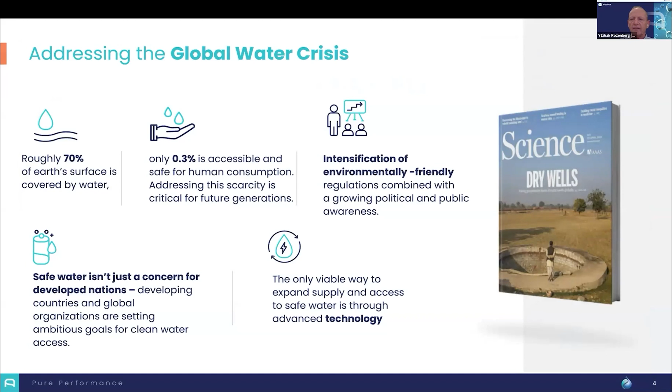As many of you know, only a small portion of Earth's water is safe for consumption. Technology is the only way for ensuring global access to safe water. Our solutions focus on eliminating pollutants rather than capturing or sorbing them, which only transfers the problem from one place to the other. We put all our efforts in finding ways to solve the problem by using HOD UV light.

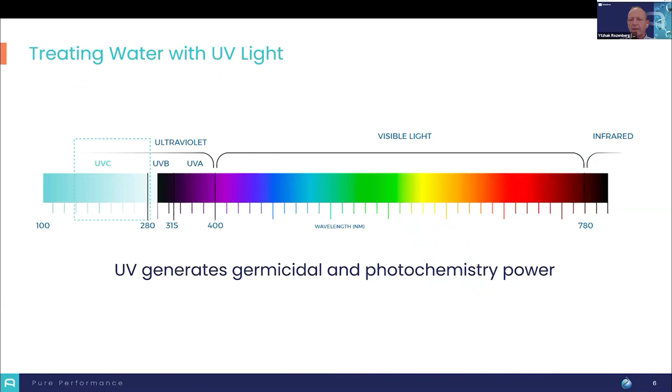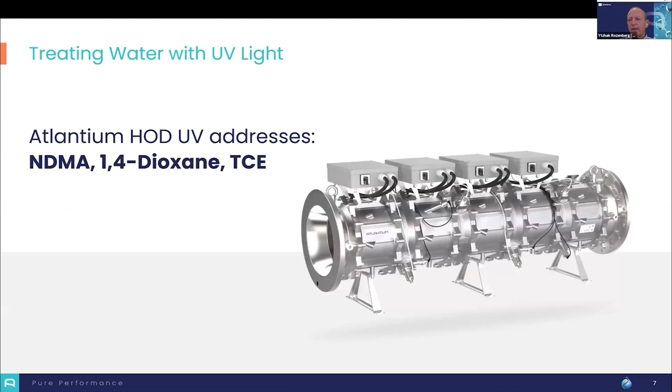UV light is a viable tool for photodecomposition of pollutants while generating germicidal and photochemistry power by direct photolysis or in combination with dedicated additives. Atlantium is currently active in providing solutions for such needs, such as NDMA, 1,4-dioxane, TCE, and others.

Now let's talk about PFAS, also known as forever chemicals. These chemicals are resistant to breakdown and persist in the environment. Atlantium has teamed up with Enspired Solutions to provide a highly sophisticated solution to eliminate PFAS. Effective PFAS destruction with UV requires consideration of the specific water characteristics, the target power, and the light spectrum. Optimizing for these aspects ensures the system delivers maximum effectiveness in addressing PFAS contamination.

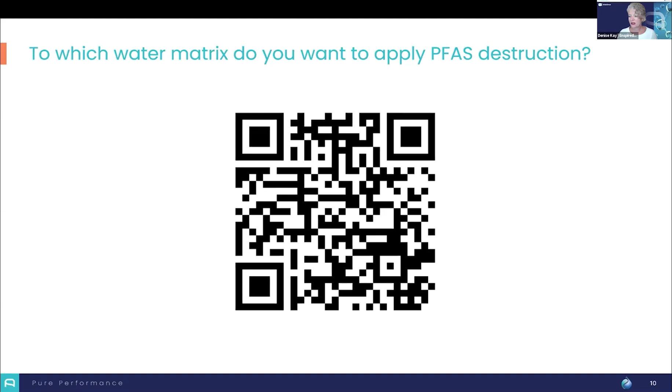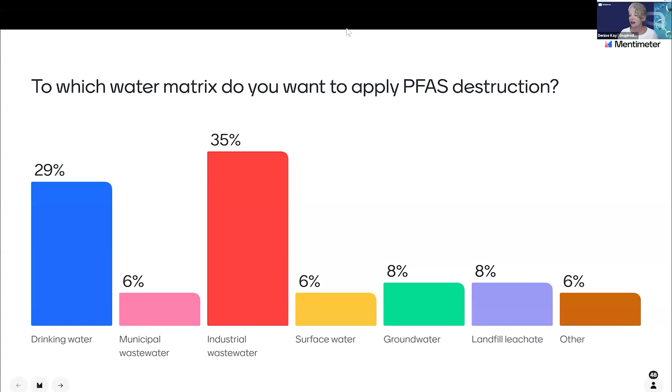It looks like industrial wastewater is leading, with drinking water not far behind. Groundwater contamination is pretty significant too. Thank you. That's a great indication and very helpful to us.

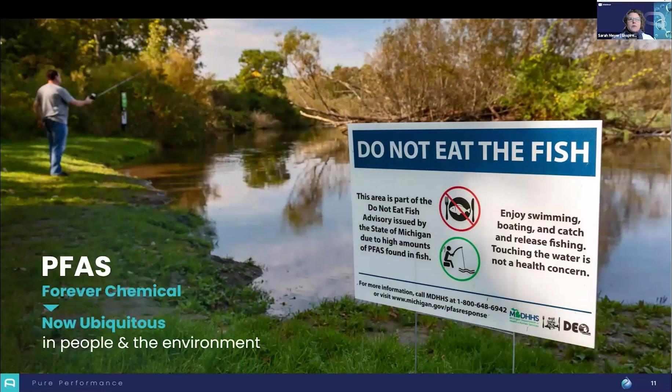I'm going to start by building on what Itzhak started with today. PFAS, they're referred to as forever chemicals because they don't naturally break down in the environment. And the rising amount in our global water resources has resulted in 95% of us having detectable levels of PFAS in our blood. There are many routes for PFAS to get into the environment, and human exposure comes through water, food, and convenient household products. Unfortunately, PFAS exposure is now linked to negative reproductive outcomes and multiple types of cancer.

With the increasing regulation and growing awareness of risks posed by PFAS, companies contributing to environmental releases are facing substantial costs. Fines and litigation settlements related to PFAS pollution are frequently in the news these days, with costs ranging from millions to actually billions of dollars. Current methods to manage PFAS in water effectively really just push it around, capturing it on filter media and disposing of it in ways that can risk re-releasing a portion back into the environment.

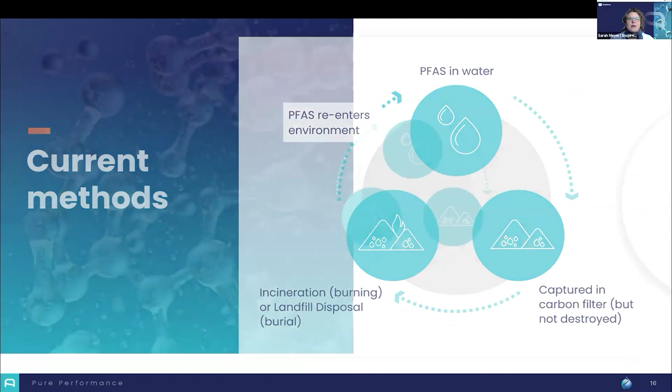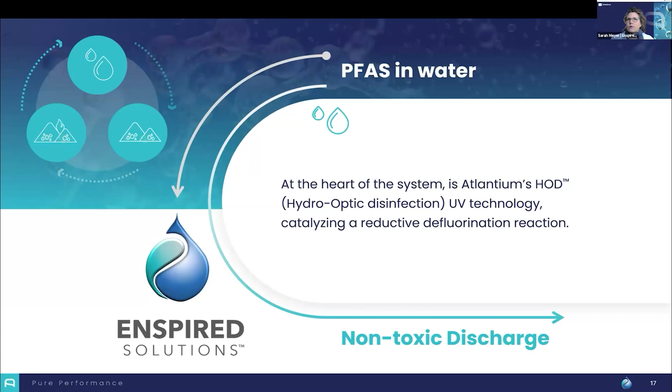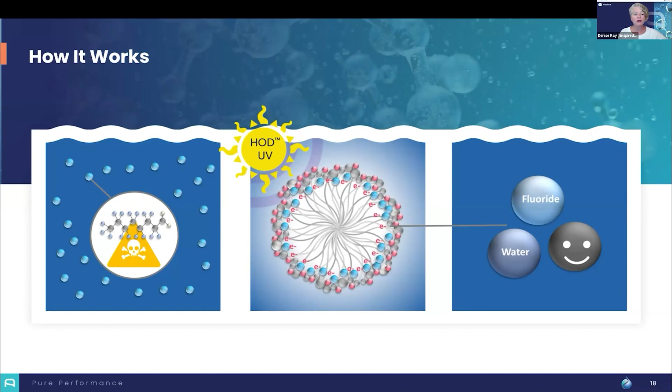The system is not pressurized and it is not heated. This results in harmless byproducts, including fluoride, water, and simple non-toxic compounds. And by the way, we can monitor the destruction reaction in progress in real time by measuring the production of these fluoride ions. And we're recognized. Enspired's chemistry has won an award from US EPA and Department of Defense by meeting their criteria for PFAS destruction and energy efficiency.

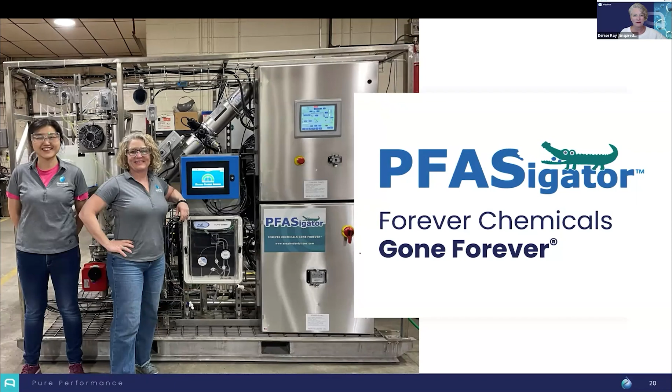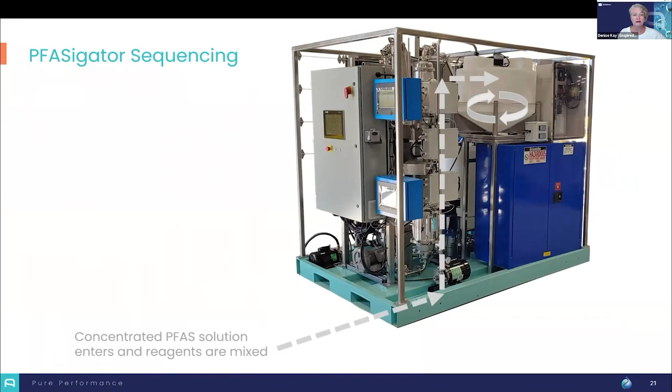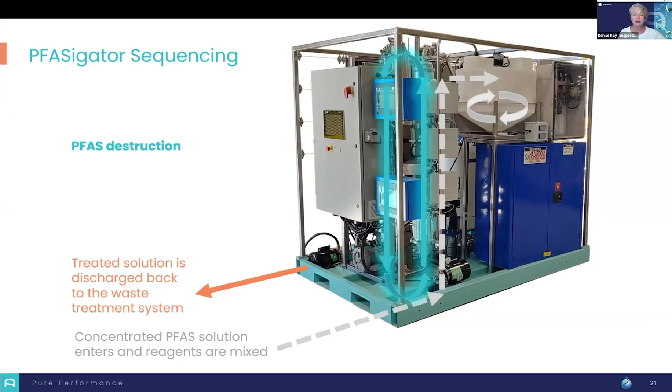We call our total solution the PFASigator. The PFASigator is modular automated equipment and the patented chemical reactions that occur within the equipment. This is me and my co-founder, Meng Wang, with our first commercial scale PFASigator. The PFASigator is a batch reactor. Concentrated PFAS solution enters the reactor and liquid reagents are mixed in. The batch is circulated through the HOD UV light system while fluoride is monitored as a real-time indicator of PFAS destruction. When the targeted level of destruction is obtained, the treated solution is discharged back to the waste treatment system.

PFASigator has comprehensive process monitoring and control to ensure reliable operation. The real-time fluoride measurement confirms the PFAS mineralization. The UV lamp sensor ensures efficient HOD UV functionality. And there is automatic reagent dosing, along with remote monitoring and control from mobile phones.

All of these features support your peace of mind, knowing that the equipment is functioning around the clock with direct evidence of PFAS destruction, so that you have confidence in meeting site compliance requirements. The PFASigator is highly energy efficient and scales well when included in a recirculating process flow with other technologies that separate and concentrate the PFAS.

Using an example of PFAS-contaminated groundwater, the energy-efficient recirculating process flow works like this. PFAS-contaminated groundwater enters the separation and concentration unit where PFAS is removed. The discharge from this stage is the system effluent that meets your PFAS discharge goals.

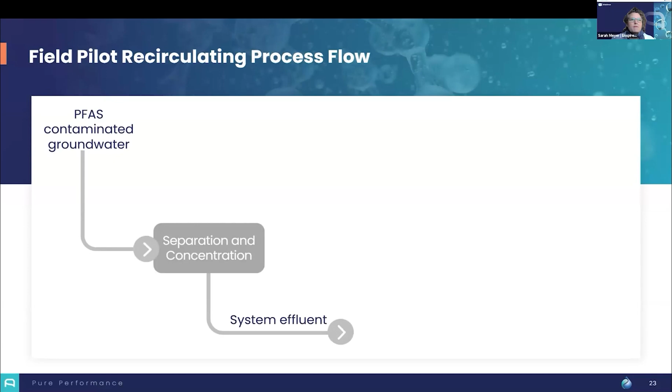The PFAS that was removed is now concentrated into a smaller volume of liquid, and that concentrate goes to the PFASigator for 1 to 2 orders of magnitude PFAS destruction. At high concentrations, PFAS destruction is highly efficient. When PFASigator has met your site-specific PFAS destruction targets, the liquid is discharged and returned to the separation and concentration unit, where any remaining PFAS is reconcentrated along with the groundwater flow.

And I'll further add some data here from our 2023 pilot test at an industrial facility in Michigan, where we treated PFAS-contaminated groundwater continuously for 1 month. PFOS was the target compound, and it was at a concentration of 1,600 ppt in groundwater. 5,800 gallons per day were pumped into a foam fractionation unit for separation and concentration. The system discharge met the site-specific criteria of 28 ppt PFOS.

Then 12 gallons per day of concentrate were generated with 380,000 ppt PFOS, and that went to the PFASigator for destruction of up to 99.7%. The remaining PFAS were recycled back to foam fractionation for reprocessing with incoming groundwater.

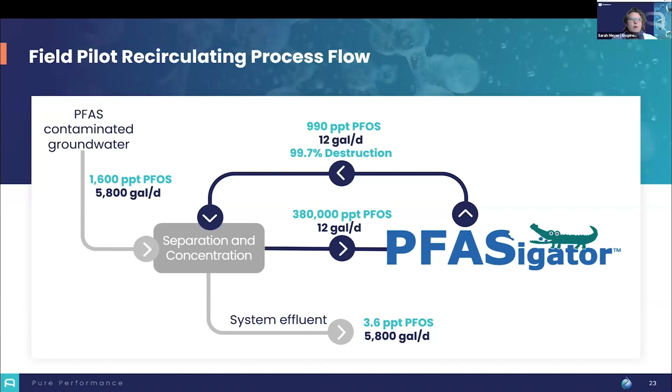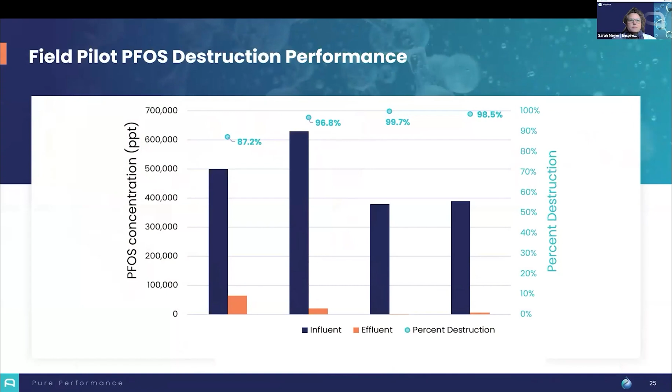One of the advantages of our PFASigator and photoactivated reductive defluorination is that the PFAS destruction occurs at atmospheric temperatures and pressure. So we can have this ion selective electrode on the equipment monitoring the production of fluoride in real time. So we're basically monitoring the destruction of PFAS by the release of fluoride ions into solution.

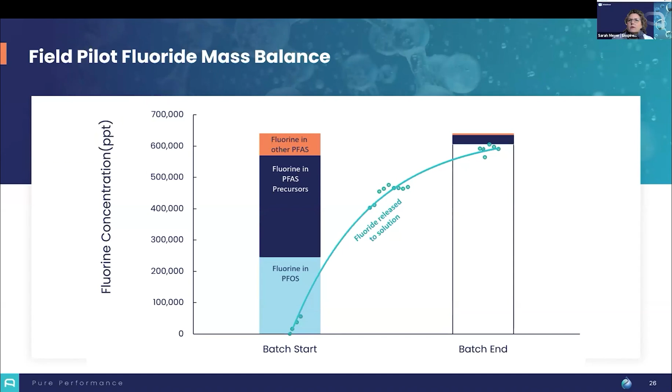Taking this one step further, you're looking at an example of the fluorine mass balance we're able to achieve using our technology. The left-hand column is all of the fluorine bound to different forms of PFAS before the reaction began. The blue line is the fluoride measured in solution as it was liberated from the PFAS. And the right-hand bar shows the small amount of PFAS remaining after treatment and how well that balances with the fluoride released during destruction. By accounting for the fluorine before and after treatment, we are assured that no PFAS was lost during treatment to venting or sticking to machine parts or other potential loss mechanisms.

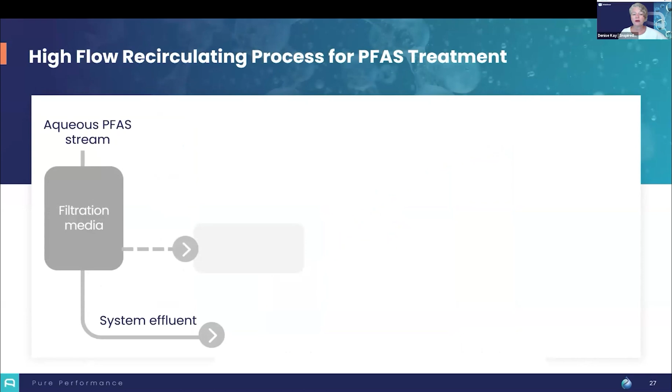So the project Sarah just described was a field pilot with a low flow rate that required only intermittent use of the PFASigator. In contrast, drinking water, water reclamation, municipal wastewater facilities can have flow rates in the millions of gallons per day. Often, these sites use filtration media to remove PFAS from water. With recent commercial availability of regenerable media, PFAS in the liquid regenerant can be destroyed in the PFASigator, with the PFASigator effluent looping back to the filtration media.

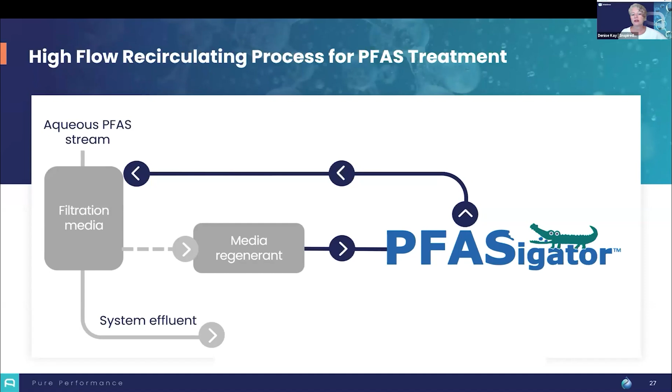So to answer the question we often hear, what flow rate can the PFASigator treat? The answer is unique for each site based on a number of variables. However, a general guide is that a single PFASigator module can treat 150 to 200 gallons of site concentrate per day. And then, depending on the technology you used for PFAS separation and concentration, this can equate to 150,000 to 5 million gallons per day for one modular PFASigator.

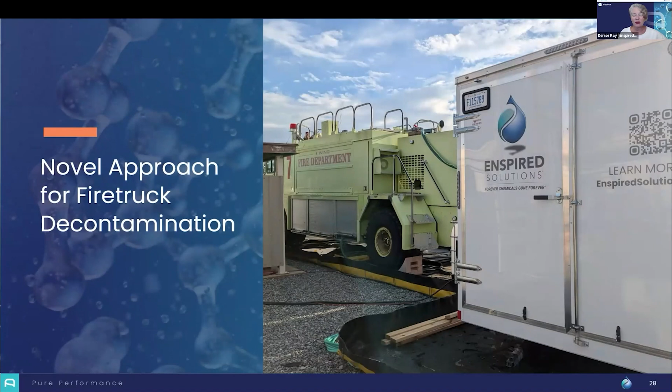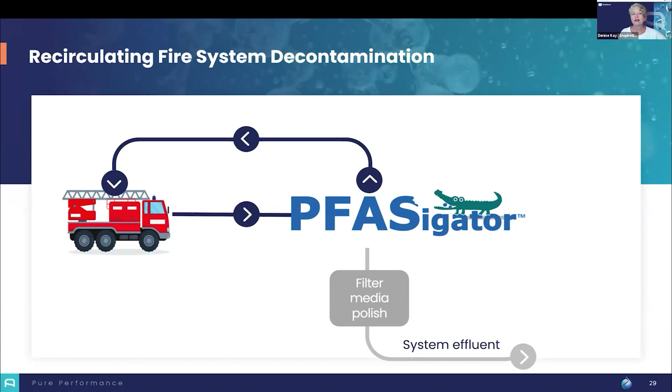Enspired has also developed a novel approach for fire truck decontamination. The PFASigator is connected in a recirculation loop with the AFFF tank and piping. The fire system is continually flushed with warm water containing surfactant, while PFAS is simultaneously destroyed. When fluoride is no longer being produced, the solution that has been circulating can be passed through a filter media as a final polish and released to a local water treatment facility.

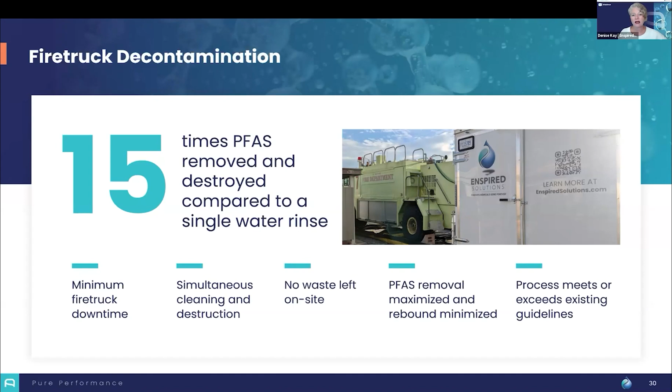This process has been demonstrated to remove and destroy more than 15 times the PFAS removed by a plain water rinse. The advantages to this approach include minimum fire truck downtime, simultaneous cleaning and destruction, no waste left on site, and PFAS removal is maximized while rebound is minimized. All of this is done with a process that meets or exceeds existing guidelines.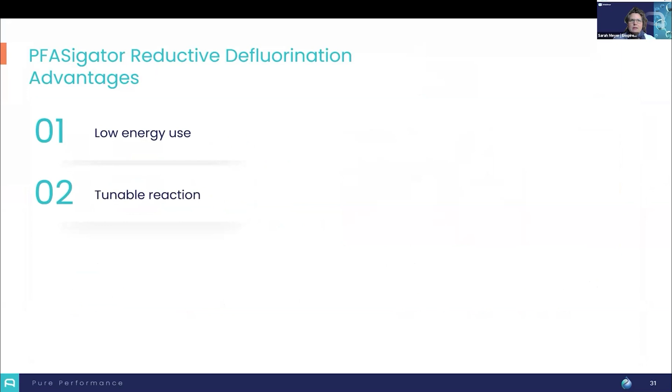PFASigator's reductive defluorination approach itself has many advantages, such as those presented on this slide. We've talked about how it achieves low energy use. And one of the ways we do that is by using what we call a tunable reaction. That is, when the UV lamp is turned off, the destruction reaction stops, and you save energy that might be used to destroy everything in the site water. Here you're only targeting what needs to be destroyed based on your requirements.

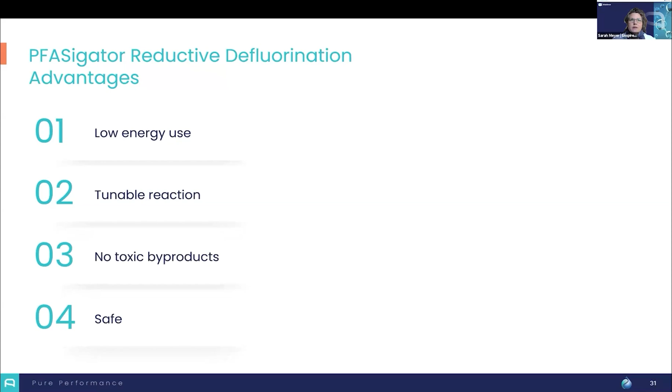The technology produces no toxic byproducts. It's safe to operate. It operates at atmospheric temperature and pressure, and you can operate it yourself. It has a modular design with a small footprint, so you can add more units with higher volumes for treatment. It is built of familiar water treatment equipment that has been in the industry and tested for years. It is not a black box that requires somebody from Enspired to operate. And it's automated with remote data monitoring. Again, this offers that peace of mind, even while you're not standing right next to the machine watching it run.

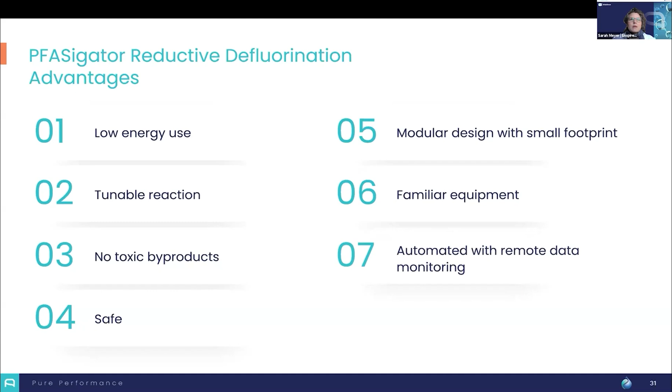If the PFASigator and photoactivated reductive defluorination sound like they might be a fit for you, determining the following characteristics of your site will prepare you for your next conversation with Enspired Solutions. Water matrix. What is the water matrix you're working with? Is it landfill leachate, municipal wastewater, drinking water, or something else? The flow rate. How much PFAS contaminated water are you managing daily? The concentration. What is your approximate concentration of PFAS in the water matrix? And discharge criteria. What are the site-specific regulatory criteria that you are striving to meet? With this information, we can get started on understanding how our technology can apply to your water.

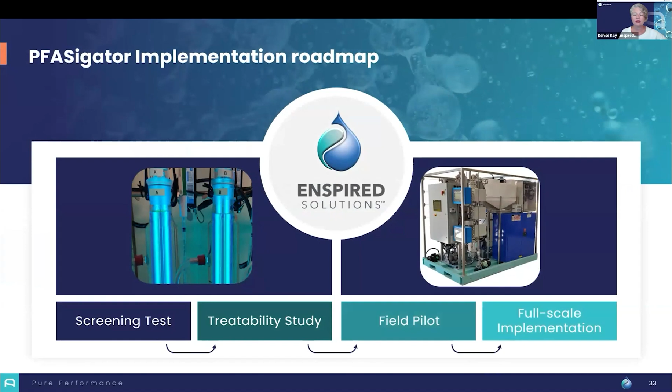So once you provide the basic information Sarah just described, Enspired can support you in developing and implementing a site-specific strategy. Screening tests demonstrate that this chemistry works in your water matrix. Treatability studies determine the scale of equipment you'll need to meet your site goals. And field pilot and full-scale implementation solve your PFAS challenges on site. When you're ready to develop and implement a site-specific strategy, Enspired is ready to do that with you.

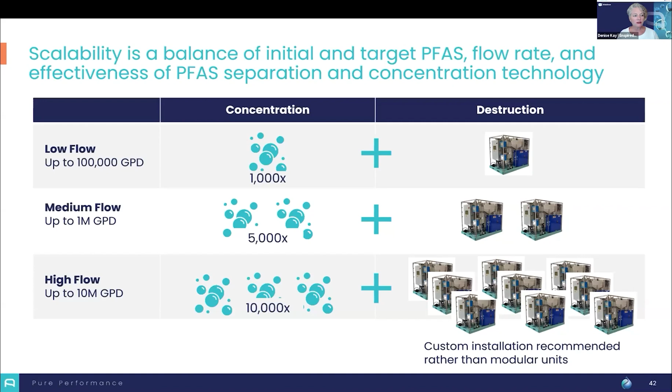And this is a common question. What information do you need to estimate the cost for PFAS destruction at one of my sites? That goes back to the questions Sarah presented. It really is as simple as these 4 pieces of information here. So water matrix, flow rate, PFAS concentration, estimated within an order of magnitude, and what your site-specific discharge is. With that, we can do a very rough estimate of the total cost.

After completion of a treatability test, we can do a very refined estimate. That treatability test gives us the kinetics of how quick the breakdown occurs, what ultraviolet light dose is necessary to break down the PFAS in your water matrix to meet the criteria you're trying to meet.

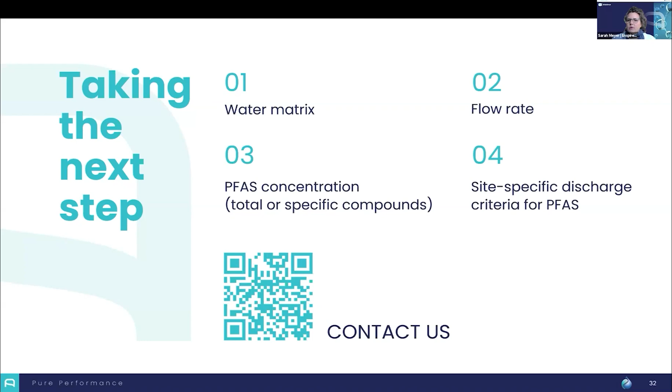Here's one, Denise, it sort of dovetails with an earlier question. Do you have data covering a wide range of PFAS, or is it focused on the main PFAS of note in the industry, PFOA, PFOS, Gen X, etc.? Specifically, short chains are a growing concern, and there's an issue with those potentially being released from thermal treatment. Yeah, thanks for that question. We do have quite a bit of data on a wide range of PFAS contaminants.

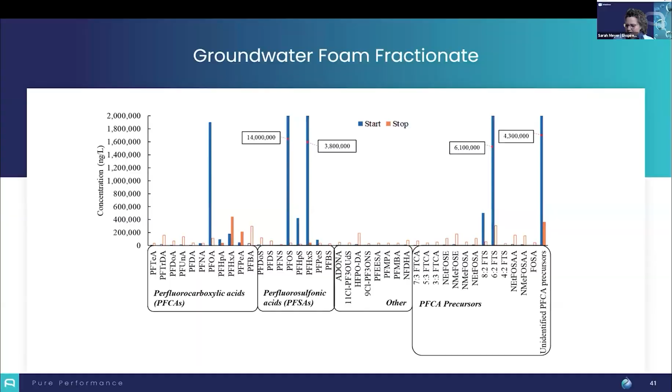Great. Here's a common question. What would be the costs, life cycle, and maintenance costs for the system? Denise, I think I can take that one as well. So the capital cost for the PFASigator really depends on your site, but on the order of $300,000 to $800,000 for one PFASigator, and that would be sized properly for your situation. The life cycle, it's built for a 15-year lifespan, and I believe if you do routine maintenance on it, you could make it last even longer.

If you were to see the PFASigator in person, you'd realize it's an assembly of recognizable water treatment equipment that we've put together to optimize our destruction reaction. So as long as we keep those parts operating, you've got a working PFASigator there. Now we've priced systems including CapEx and OpEx for multiple customers, and we've determined costs per gallon of concentrate to be in the range of $2 per gallon of concentrate to $8 per gallon of concentrate. And that would include both the capital purchase price plus the annual maintenance costs and the reagent costs for the unit and the energy use.

Yeah, I'll add to that energy because that is a standout. When you look at some of the other destruction technologies that we mentioned are fighting the thermodynamics of water, the fact is that cost range that Sarah just estimated we've seen for real systems we've worked with includes energy. Thanks for that question.

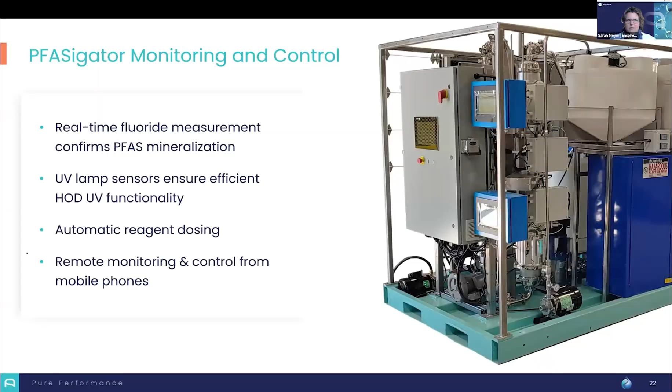One last thing I'll say is that there was a question about where do we manufacture our units. They're manufactured right at our lab and offices in Lansing, Michigan. We're in the US. We're a women-owned, certified WBENC and WOSB company. We're very proud of that.